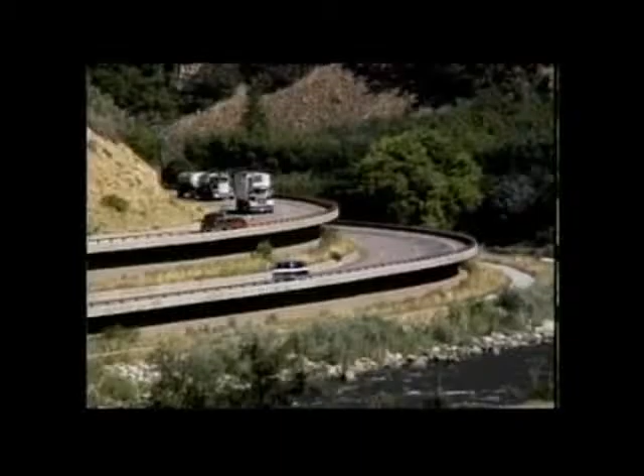Some of these technologies were developed on the Glenwood Canyon I-70 project, which I managed for 12 years. Under my leadership, we aggressively developed and implemented innovative solutions in many areas. Traditional methods and materials would not have allowed us to construct this award-winning project.

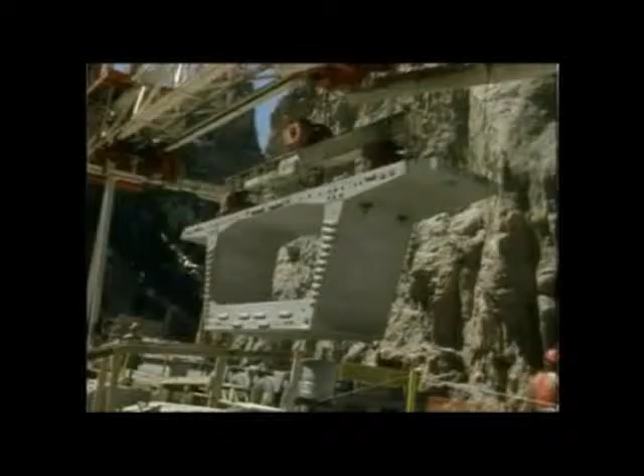Technology does not stand alone. It requires professionals for implementation, problem solving, and continual improvements. We call these specialists subject matter experts. Adoption of new technologies requires support from an enlightened management. We will show you in this video how your agency can both save money and provide better service through internally supported MSE technologies. First, let's look at why agencies are not already implementing these MSE technologies.

There must be reasons why we're leaving hundreds of millions of dollars on the table each year. There are reasons, and these include the human tendency to resist change, to preserve existing paradigms. Technologies, however, are never static. From the beginning of history, man has pushed the limits of his ability. In transportation, we began on foot. And then we domesticated animals to carry us farther and faster. We continually improved the efficiency of horse-based transportation and reached the apex of that technology with the stagecoach. We drove the horse to its limits of power and speed.

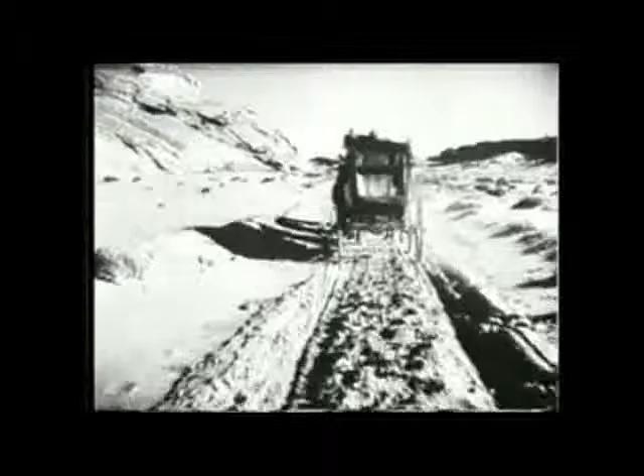Technologies reach conclusions. There are indeed limits on the envelope. Technologies continue to evolve. New methods and materials replace the old. The steam locomotive replaced the horse. However, the stage driver was not automatically a locomotive engineer. This analogy illustrates a paradigm shift. Accepted practice in transportation changed dramatically and forever with the introduction of the steam locomotive.

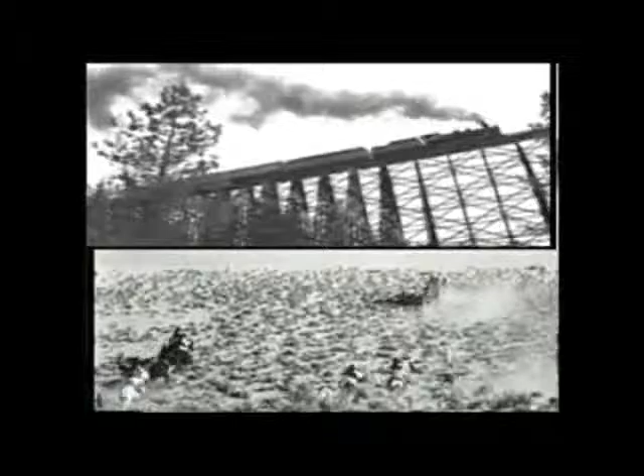A similar technological evolution is occurring in retaining features. These old workhorses are ready for the stable. Externally supported retaining wall systems are being replaced by internally supported earth-reinforced features. And just as in any major paradigm transition, technologists, subject matter experts, must evolve to advance the new paradigm. Our state DOTs are collectively losing hundreds of millions of dollars each year because they do not have subject matter experts in responsible charge of selection and design of MSE features.

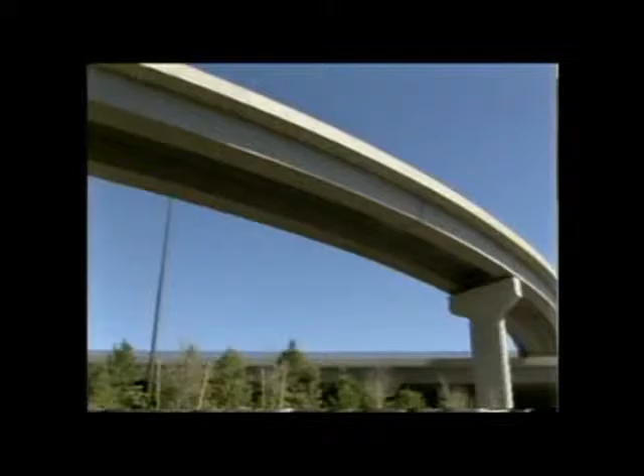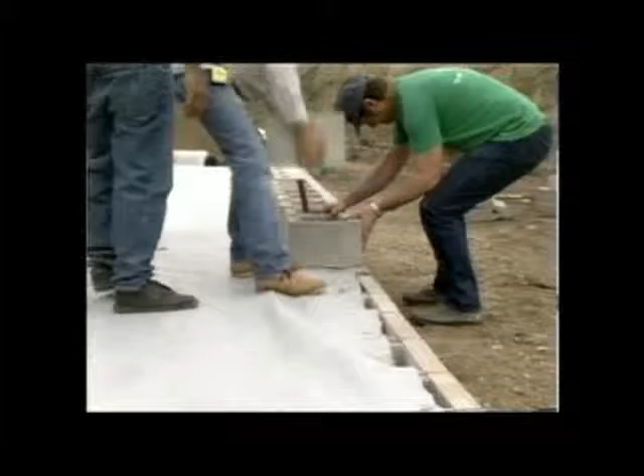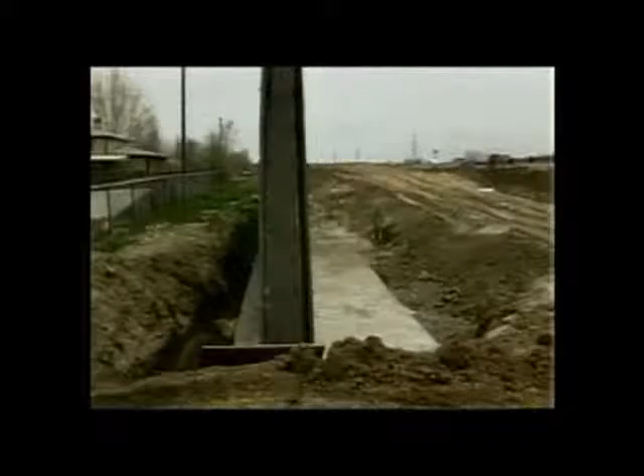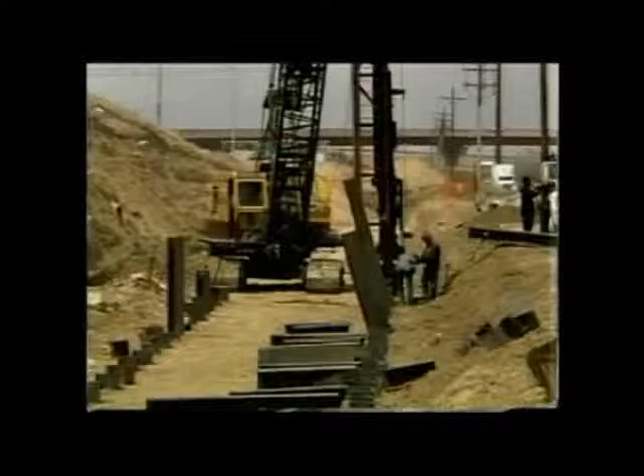State DOT engineers routinely design and supervise construction of these magnificent monuments. Yet few state DOTs can design or support construction of these basic retaining systems. Instead, state DOTs often rely on yesterday's technology or proprietary systems. Here is a cast-in-place wall on piling that cost over $70 per square face foot to build. A CTI generic MSE alternative designed in-house would have saved hundreds of thousands of dollars on this project.

These kinds of wastes of public funds become less tolerable as state DOTs realize just how simple the CTI MSE technologies are. There is nothing special, nothing difficult in design and construction of the basic CTI MSE system. Facing can be as basic as a concrete block. The typical backfill is road base. Reinforcements can be steel strips, wire mesh, polymer grids or sheets, any durable material. CTI generic MSE features are the future in wall and slope technologies. The sooner our state DOTs develop internal design and construction expertise, the sooner we begin saving money.

CTI can teach MSE technology to transportation agencies and assist in developing subject matter experts. We have internationally recognized instructors and the finest course materials. The course is designed for engineers who have no formal training in advanced soil mechanics. What we ask of the student is a willingness to learn a new technology and a commitment to use it. CTI will assist you in building the bridge to savings.

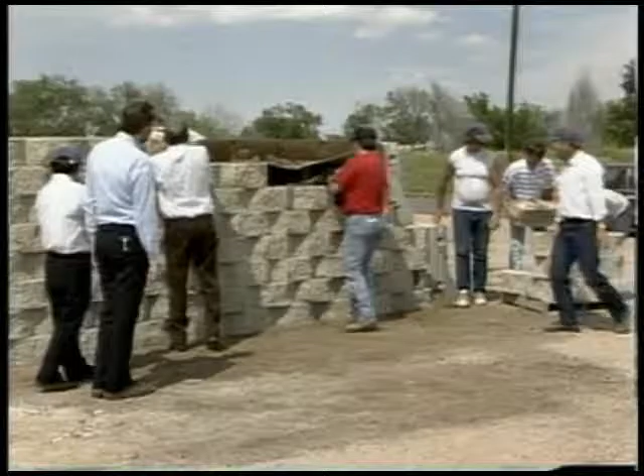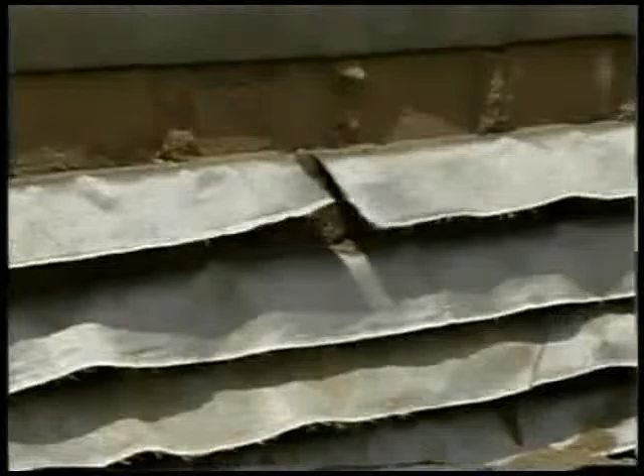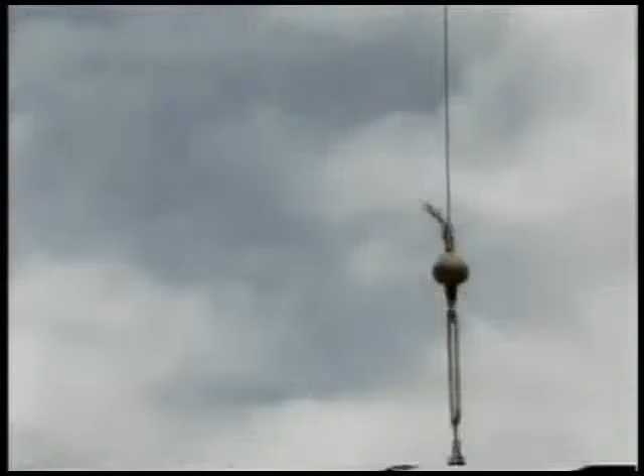This is a CTI MSE generic modular block test wall. We're using this wall to demonstrate the principle of internal stability. On this CTI MSE generic modular block wall, we used two types of facing blocks. We added a surcharge and we burned the connections between the blocks and the reinforcements.

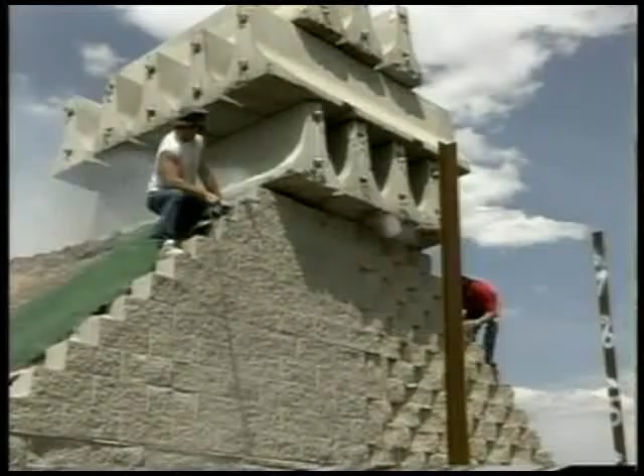This is another demonstration wall. These blocks are made of recycled tires, and they're so light they float. We also cut the connections on this wall.

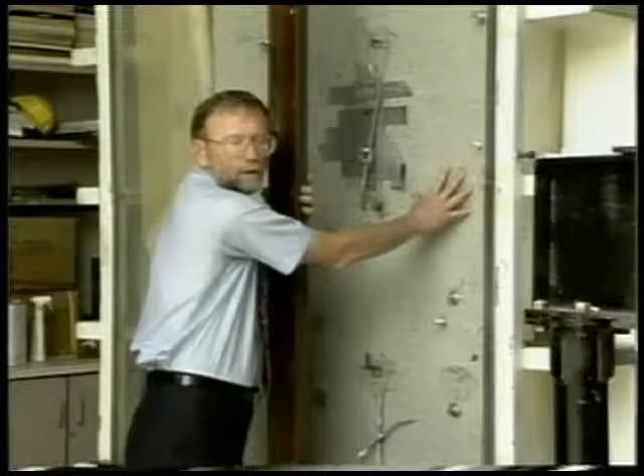This is our full-scale retaining wall test frame at the University of Colorado at Denver. Here we construct and test CTI MSE retaining walls. The current test includes a full-height concrete panel facade with shredded tires as backfill.

This is our full-scale landslide simulator. Inside, we construct landslides and test various remedies. The current test is a new concept we call the CTI Deep Patch. It consists of a negatively battered fabric wall and tire shred backfill.

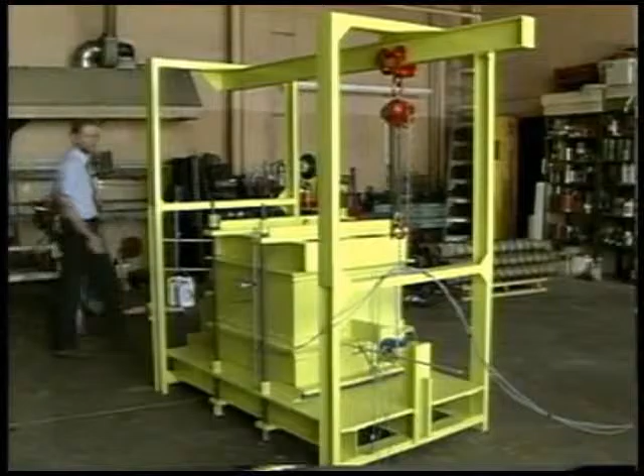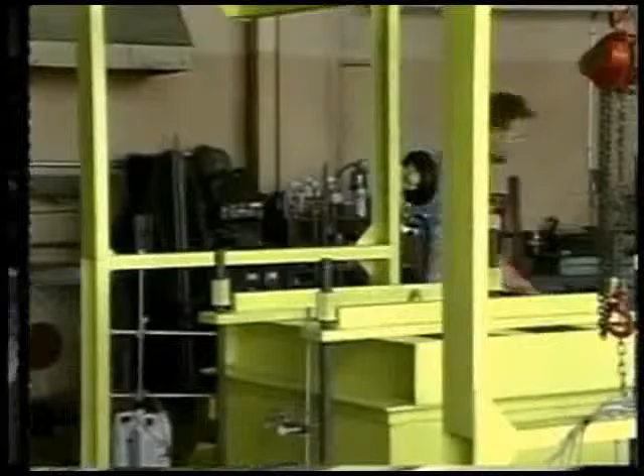This is our direct shear device. It has 30-inch boxes, which allows us to test a variety of backfills, including shredded tires and sawdust. We can also test the interface between reinforcements and backfills. This is a part of the CTI test frame where we test the connection strength between the modular blocks and the geosynthetic reinforcement.

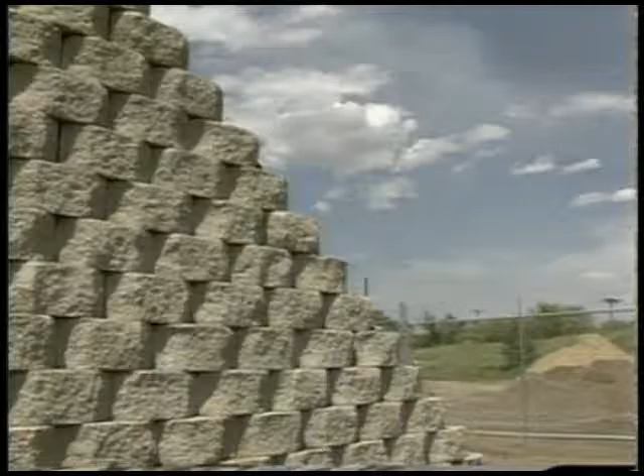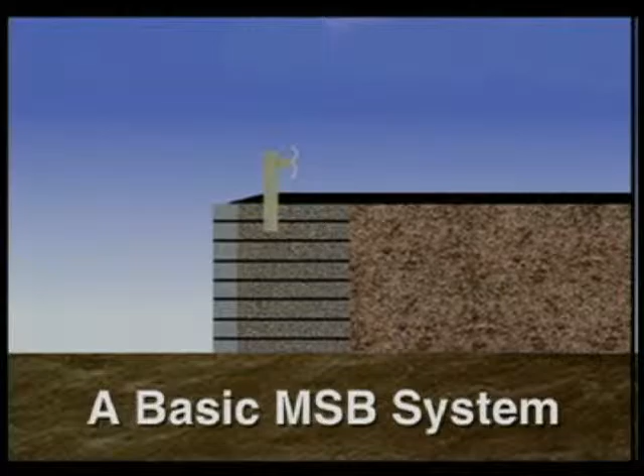What we have learned over the past several years is that CTI MSB technologies are the future in walls and steepened slopes. They represent the next generation in technology. CTI generic MSB systems are simple to design and easy to construct. Let's look at a basic system.

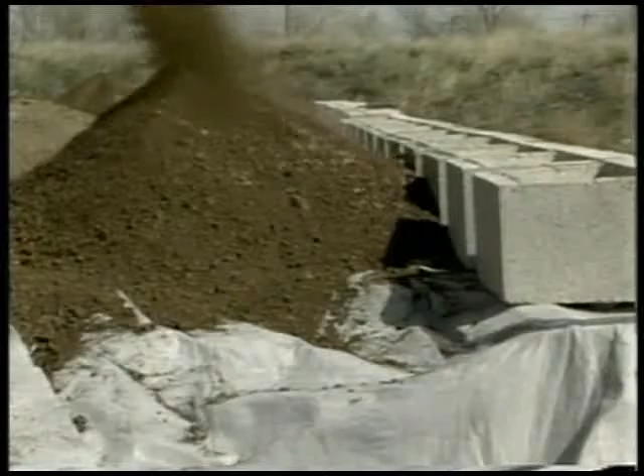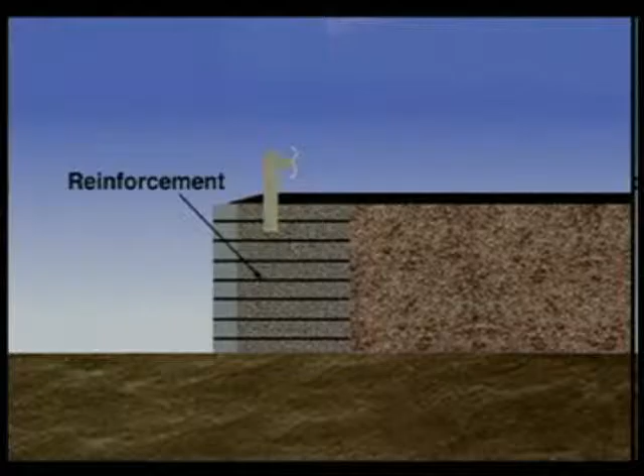Backfill is a granular soil. Road base is a good choice. Everyone knows how to build with road base. The easiest facing for construction is a dry cast modular block. Geosynthetics can be used for reinforcement. Placement is as easy as it looks. Geosynthetic strength, spacing, and dimensions can be determined from the CTI design charts.

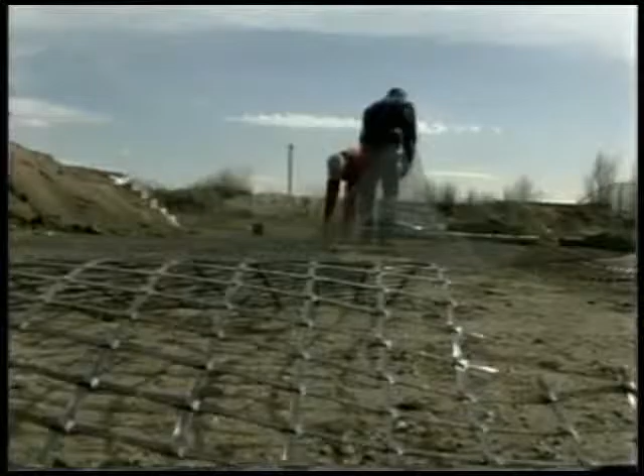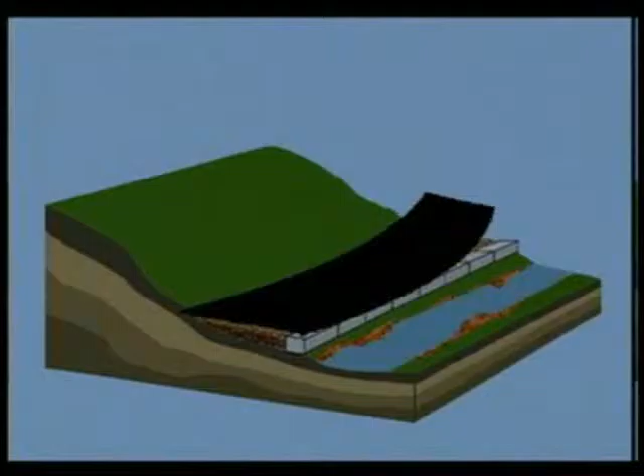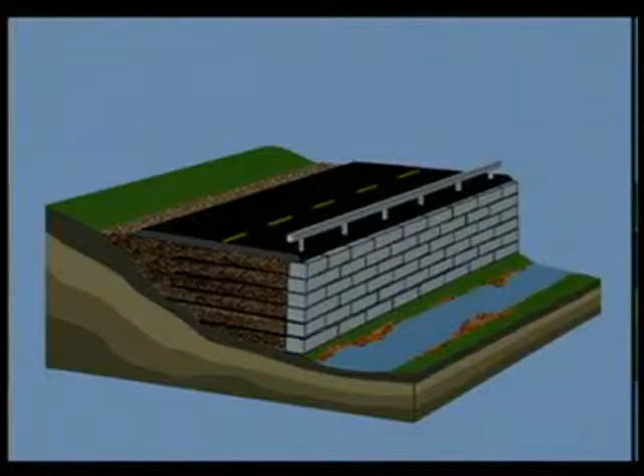Full-scale testing by CTI shows that this composite of backfill and reinforcement is 20 to more than 50 times stronger than the forces that drive internal failure. High-end geosynthetics have half-lives of several hundred years. Dry cast concrete blocks can be designed to last at least 75 years. And road base is certainly a durable construction material. Safety, longevity, and simplicity are the hallmarks of the basic CTI MSB generic modular block system.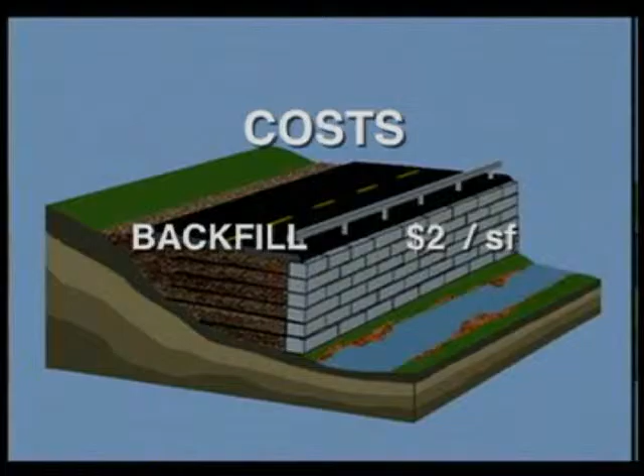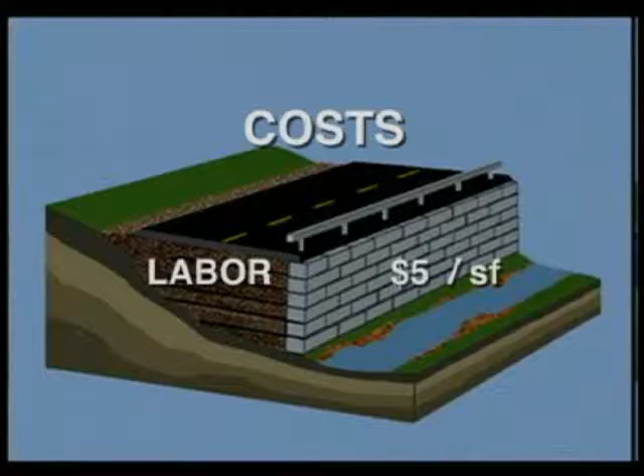Costs for this basic system are quite reasonable. Modular blocks cost $2 to $3 per square face foot. Reinforcements usually cost $2 to $3 per square face foot of wall. Granular backfill is about $2 per square face foot. Labor varies with location, but $5 per square face foot is a fair average for construction costs. At $11 to $13 per square face foot, the CTI MSE generic wall is one of the least expensive systems in the country.

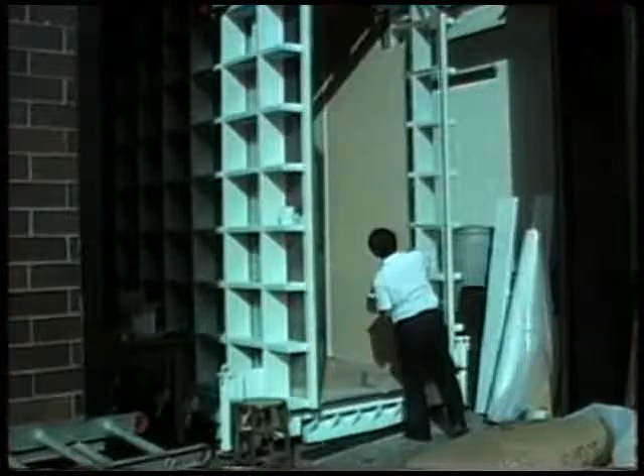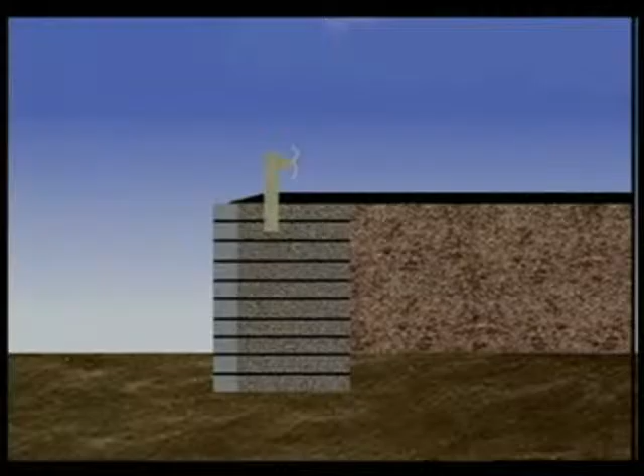The cutting edge of the sword of economy is honed with research findings from CTI and by in-house MSE experts at the beginning of project development. Let's look first at how research has improved the economy of the CTI MSE systems. One of the first discoveries was that internally stabilized features do not require embedment. They are quite content sitting on the ground. While some guidelines suggest embedment of internally supported features, this only increases size and cost. Even a 1-foot embedment adds 20% to the construction. 3 feet adds a whopping 42% to the construction.

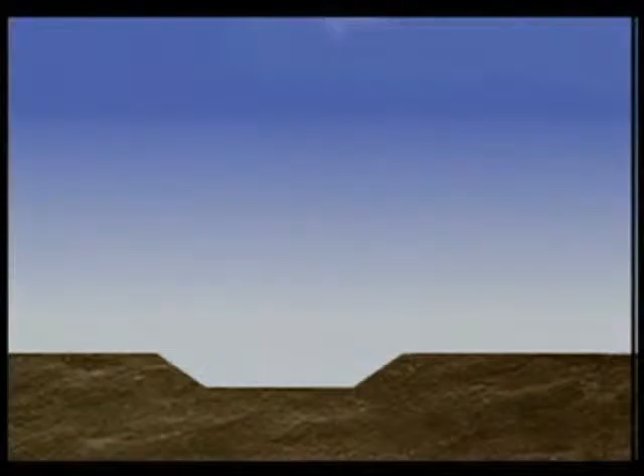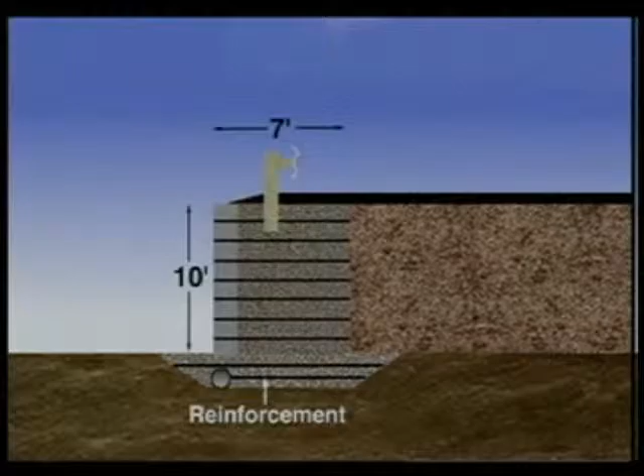Where foundation conditions will not allow the wall to be placed on the existing ground, simply excavate the unsuitable soils and replace the excavation with a compacted granular soil. Then build the CTI MSE feature on the improved platform. For the most severe foundation conditions, the designer may consider adding light reinforcements in the improved foundation. But for heaven's sake, don't waste money on a wider or taller wall than is required.

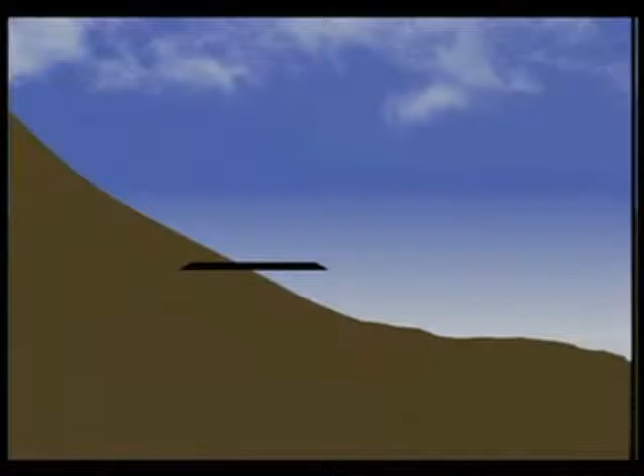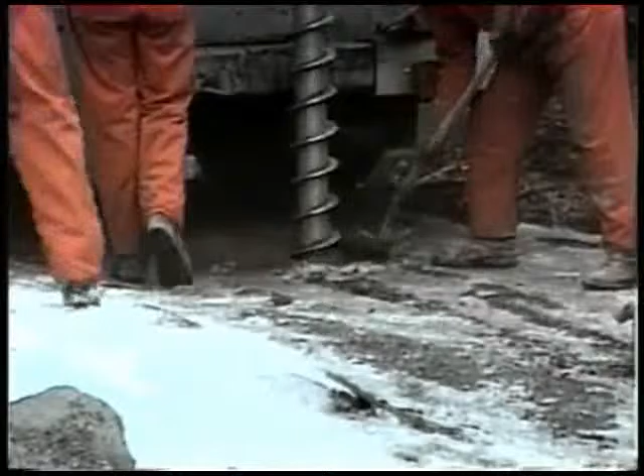The economies in applications with CTI MSE systems are maximized with in-house subject matter experts who participate from project inception. Transportation professionals can identify with the iterative process of finding the best fit for a new or improved facility. In this simplified example, the project manager can move the platform to any of several locations. If a cut is to be considered, the project manager uses geotech subject matter experts to determine subsurface conditions and to provide the most cost-effective design.

In the case of bedrock, steep cuts can be used. But if the hillside is subject to landsliding, disaster could occur. The project manager would not leave the responsibility for design of this all-cut cross-section to vendors and contractors after the project has been awarded. This is not always the case with an all-fill section.

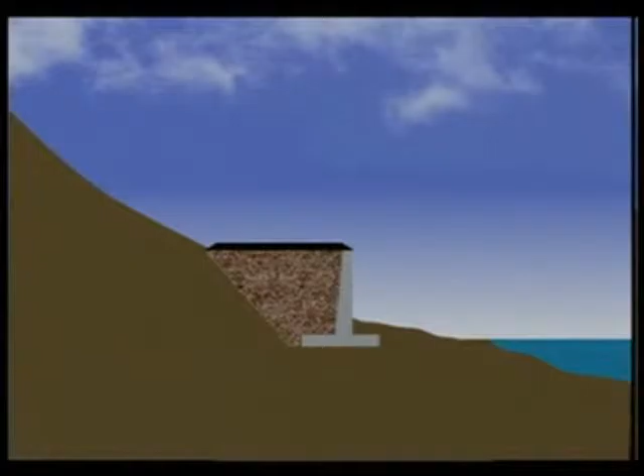Most state DOTs do not have MSE design expertise, and they are likely to follow one of 2 courses of action. In the first case, they will design what they know, which is usually a concrete cantilever wall. And if the subsurface conditions are unfavorable, the traditional designer will underpin the traditional wall. These constructions are fiendishly expensive, often 3 or 4 times the cost of MSE solutions. What can be missed without in-house expertise is the least expensive option, a steepened slope.

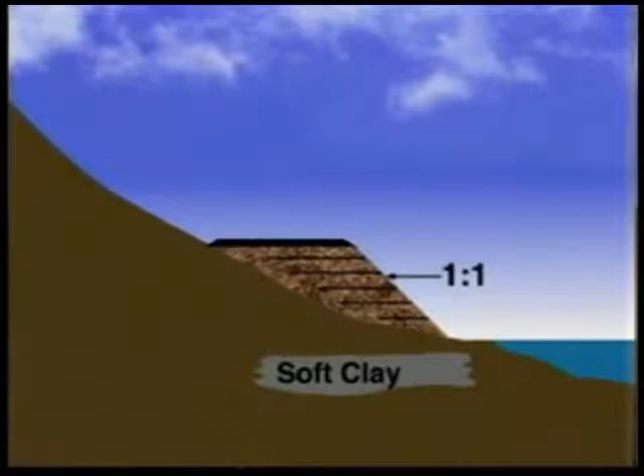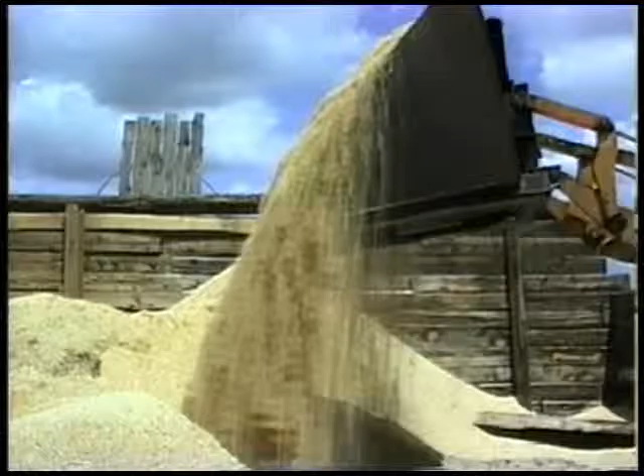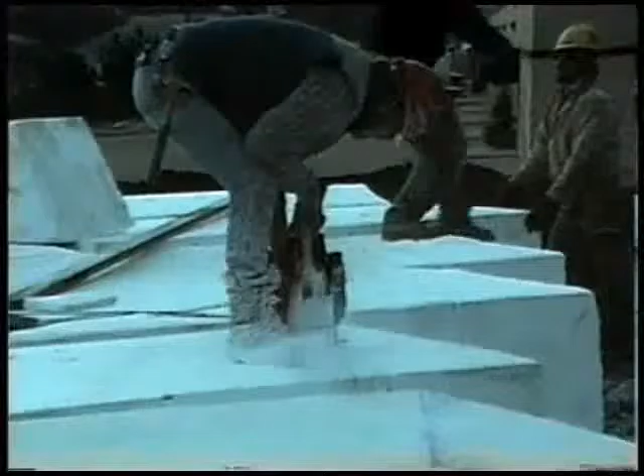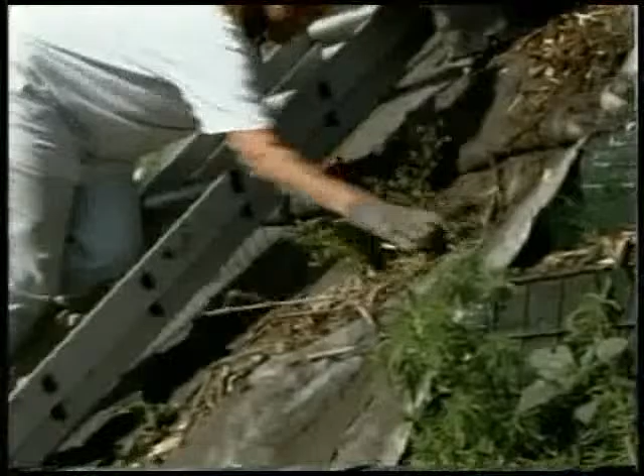And if the foundation is weak, then MSE designers can use durable, lightweight fills such as shredded tires. Shredded tires make a good backfill for walls and slopes. Sawdust can be used as backfill. Expanded polystyrene is an excellent construction material. These modern designs take advantage of the principle of internal stability. No facing is needed except to prevent erosion. Several systems are available to reinforce the backfill and prevent erosion. This steepened slope demonstration project is a joint venture of CTI and Tensar Earth Technologies.

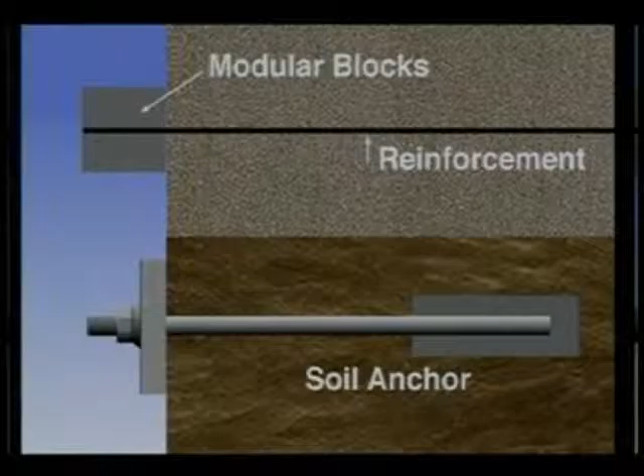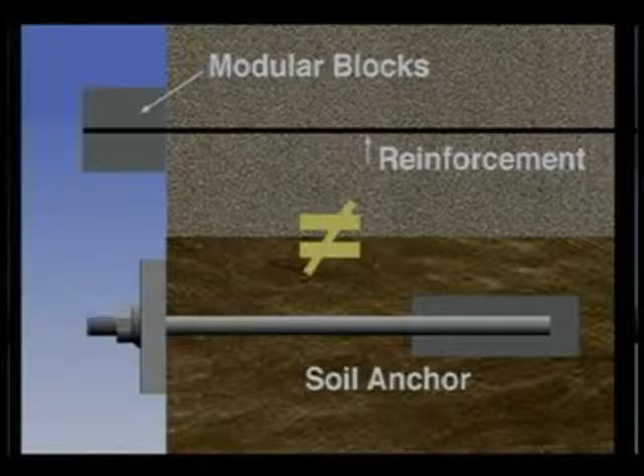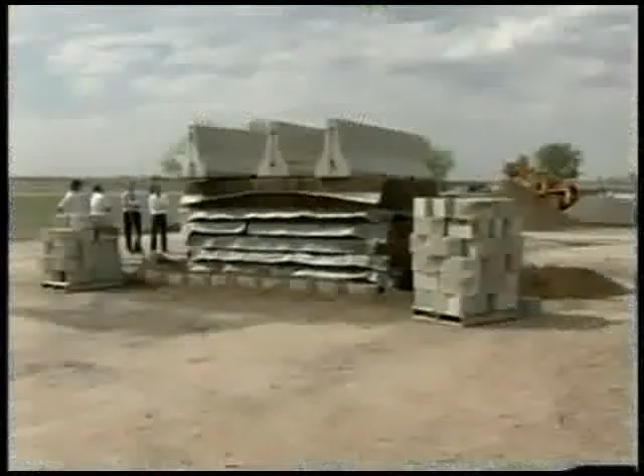The principle of internal stability can be illustrated by comparing a soil anchor with a segment of reinforced earth. If the nut of the soil anchor fails, the system fails, whereas the most important role of the facing block on the internally supported system is preventing erosion. Reinforced steepened slopes and walls differ only in the angle of the face. Once the angle of repose of the backfill material is exceeded, the reinforcements take most of the horizontal load.

The other choice a DOT may make is to simply draw a vertical line and leave the solution to contractors and vendors. This avoidance of responsibility denies the project manager the assistance of subject matter experts in wall selection during project development. An approved list is no substitute for internal expertise.

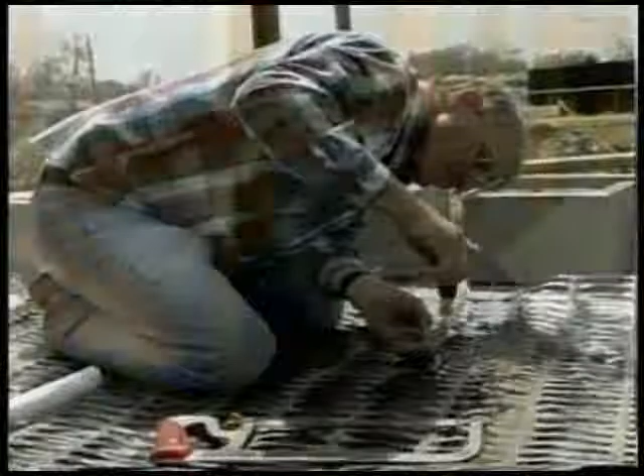Put the DOT people to work. Let them assume an ownership role and advance the MSE technologies. Our DOTs have capable engineers who would rather be self-reliant. Research pays off only when it is implemented. Let's look at applications of CTI MSE technologies.

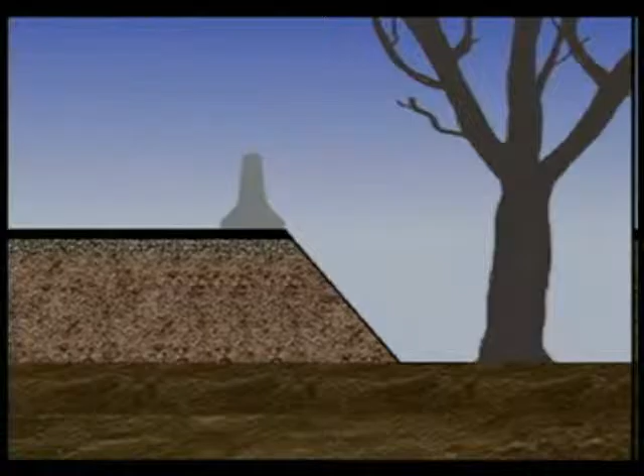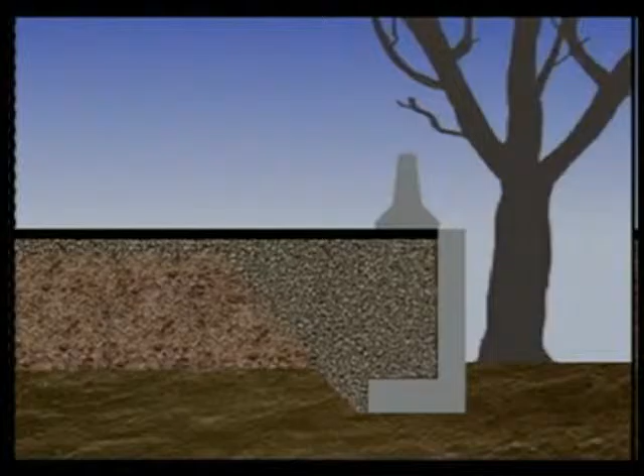CTI MSE subject matter experts provided a solution to this space constraint that a contractor probably could not. A highway widening was requested by a township, and they also wanted to save a grove of trees. A traditional, externally supported system would have damaged the trees. Any embedded system would have damaged the trees. A CTI MSE generic wall was the optimum solution. A truncated base was selected to minimize traffic disruption, and the wall did not require embedment.

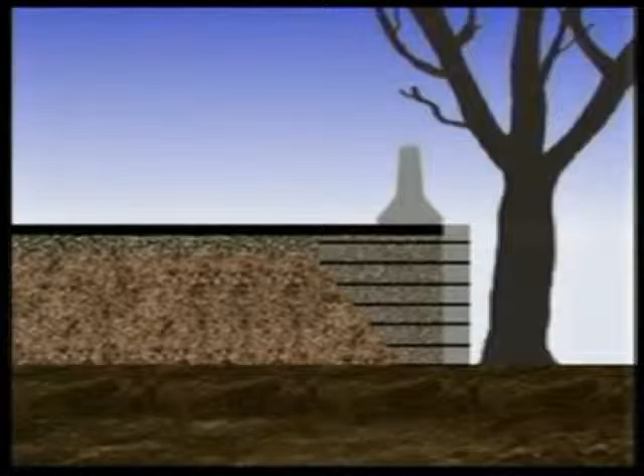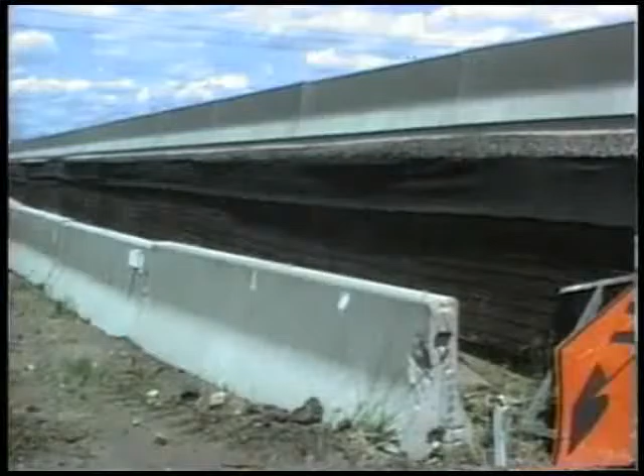A state DOT saved at least $1 million with non-embedded MSE walls over an industrial site that was known to have contaminated soils. Externally supported walls would have required excavation into those soils. Thousands of feet of these temporary walls were constructed. Milled asphalt was used as backfill. This one project will pay for the MSE generic design squad for years to come.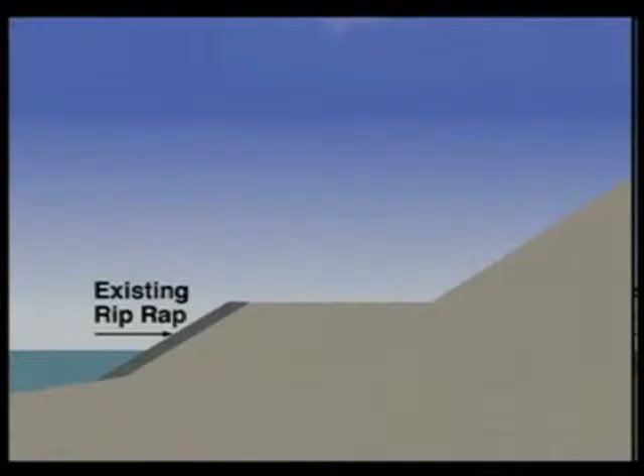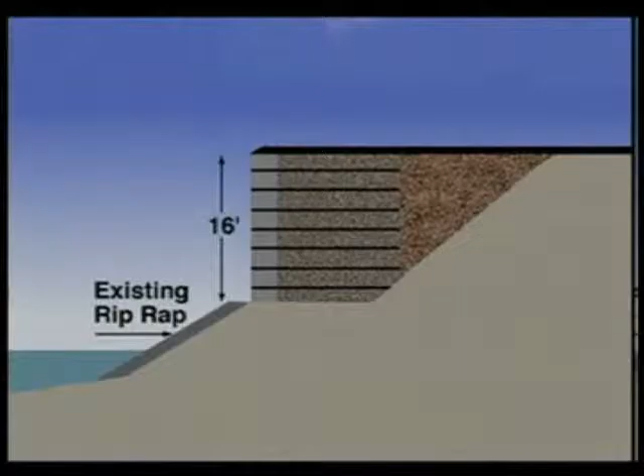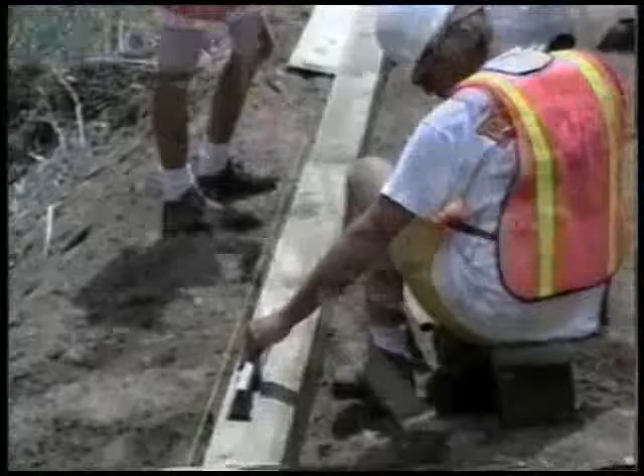Here is yet another example of saving hundreds of thousands of dollars on a single project. Transportation professionals will appreciate the differences in time as well as cost between these two constructions. This CTI MSB generic system on this project utilized timbers for forming and facing. These treated timbers are approved for house foundations. Embedment was a nominal 2 inches.

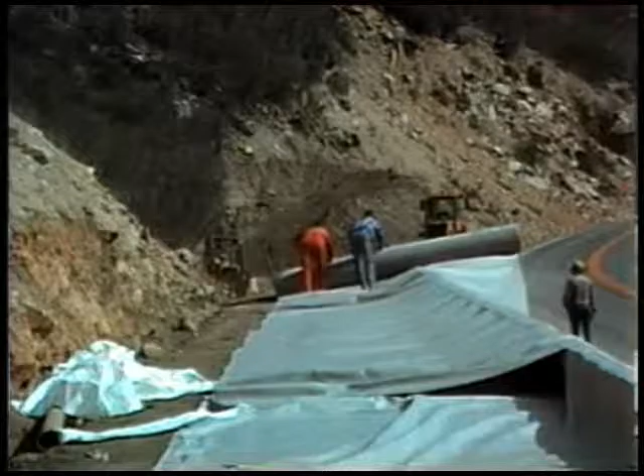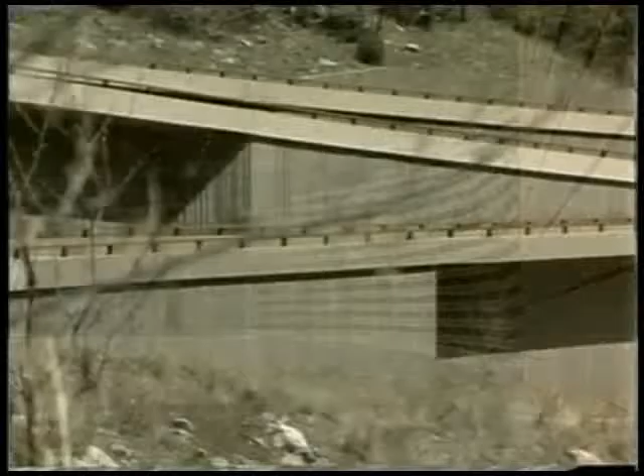Geosynthetically reinforced road bases and wall backfills have been used all over the world for many, many years. There are tens of thousands in service at this time, and there are hundreds under construction at this very moment. Mechanically stabilized backfills are the future in retaining walls and steepened slopes. MSB systems are versatile and can accommodate many facades.

CDOT has adopted internal responsibility for MSB design. We proved through a trial implementation program that millions of dollars can be saved each year in Colorado with this technology. The paradigm shift isn't easy and requires a commitment from the top down. MSB technologies are the future, and the Colorado Transportation Institute can provide a valuable service in moving up the ladder of technological advancement. CTI will assist your agency in developing MSB subject matter experts.

All of us in transportation are aware of the shrinking dollars. Our maintenance efforts just aren't going to be able to keep up with the deterioration of our infrastructure. We're losing the battle to preserve our roads and bridges, but we have to find new solutions. Raising taxes and doing business the same old way won't fly in today's political climate. Laying off maintenance workers is not a good solution. Canceling construction projects is not a good solution. Better science is a solution. We can do more with less through technology.

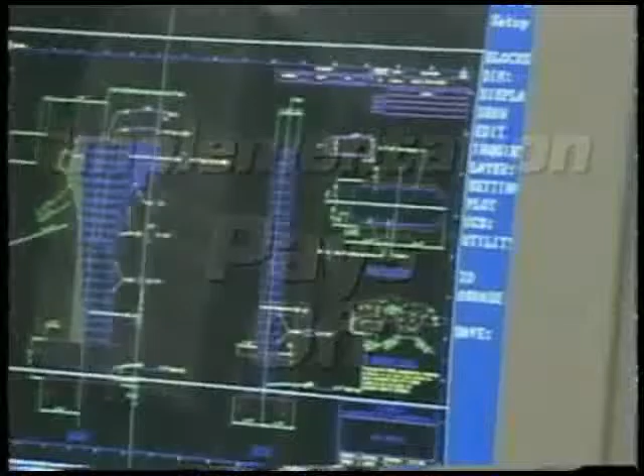All of us believe that research pays off, but just doing the research isn't enough. Here at the Colorado Transportation Institute, we stress it's the implementation of research that really starts to pay off. Research is an abstraction. Few of us in our DOTs actually perform research. Instead, what we do is implement research findings using the new and better technologies.

Of course, we can't blame today's accidents on yesterday's design choices, but we do know this. The decisions we make today, say to use the CTI generic retaining walls, can save money, and that money can be invested in the future, in finding ways to reduce accidents, in improving our pavement quality, in rebuilding old bridges. That's the value of savings. How do we communicate the value of savings to our design groups, to our construction forces, to our maintenance crews? It begins at the top.

Top management holds the key to doing our jobs more efficiently. We're the ones who set the direction and allocate the resources for this department. This is why here at CDOT, we encourage all our engineers to use new and better technologies. This is why we encourage them to use CTI generic walls. Top management can provide the bridge, the connection.

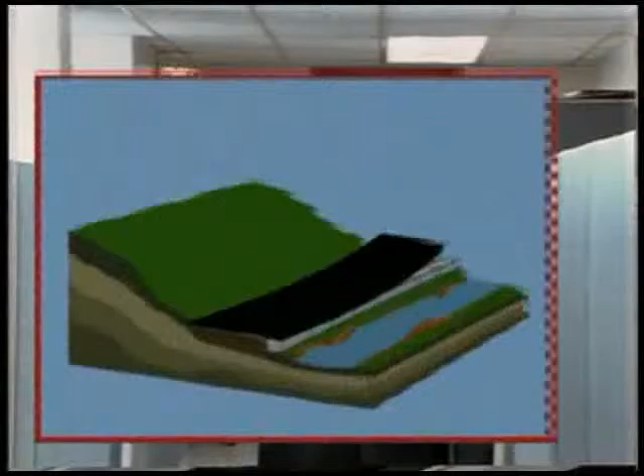CTI's generic MSE walls can save DOTs hundreds of millions of dollars a year. And we'll support your staff so you can indeed fully realize these savings. We'll help your staff become self-sufficient, design in-house, support construction crews in the field. But it's up to top management to facilitate this training, to facilitate change.